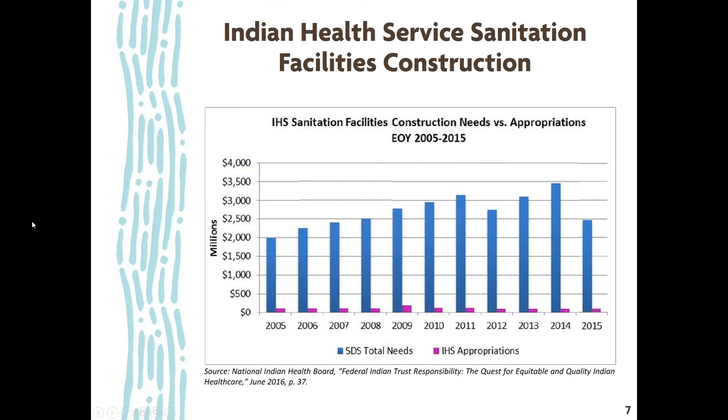So Alaska Native and American Indian communities don't receive adequate funding for water and sanitation. These are some of the ways that we work with tribes to ensure they have safe and sustainable water services. I'll discuss how we partner with tribes in these project areas: traditional and unregulated water sources, outreach and education, and engineering and evaluation.

Since we have a limited amount of time, I won't be able to cover everything. So, traditional and unregulated water sources.

According to the Indian Health Service, adequate sanitation facilities are lacking in some 145,000 Alaska Native and American Indian homes. Of that number, approximately 26,000 homes lack access to safe water supply and/or a wastewater disposal facility.

Some of the ways Native communities bridge this gap is through collecting traditional water, such as water from springs or streams, or collecting rainwater. Another way is private wells. All of these sources are not regulated under the Safe Drinking Water Act.

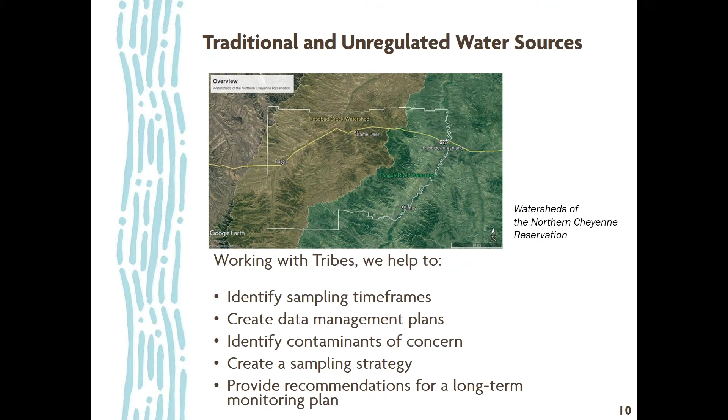You'll see in a sec just how great this project is. So the Water is Life project was created as a way to re-engage communities with water through public art.

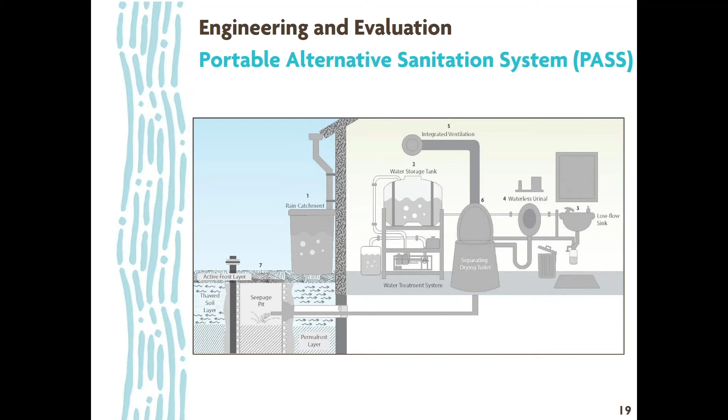But this system was created as a low-cost alternative for communities impacted by climate change and lack of water and sanitation. So there's about 34 communities in Alaska that do not have running water and flushing toilets, meaning they haul water and use honey buckets. And we all know that communities who lack water have higher rates of diseases than those that have adequate water and sanitation.

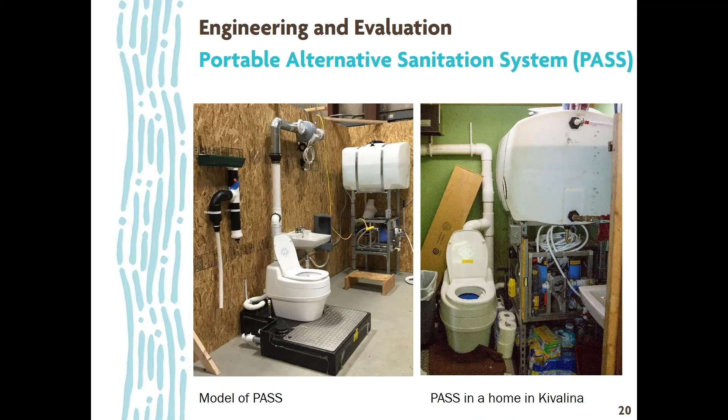And so the study I mentioned has special considerations when working with tribes. We have to go through a number of approvals in order to collect data and interview human subjects and work with communities. So we have to get approval from the tribe, we also have to get approval from their health corporation, as well as our own institutional review board here at NTWC. So we're working with the communities in a much closer way.

And we've also done this through the creation of community advisory committees in each community - there's one in Newtok and there's one in Kivalina. These committees review the interview questions, they know and understand the study, and they are aware of the methodologies being used to collect data.

We've only just started collecting data this last fall, but as we collect more, these community advisory committees are also going to help us analyze and interpret the data. So they're going to see what we see, but they're going to maybe give us a richer background and fuller understanding of what that data might mean.

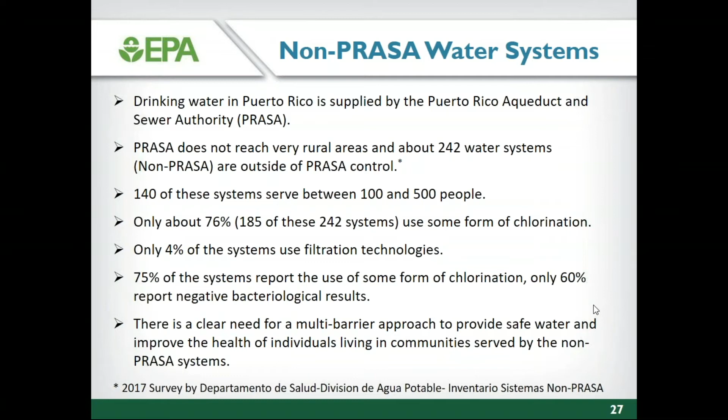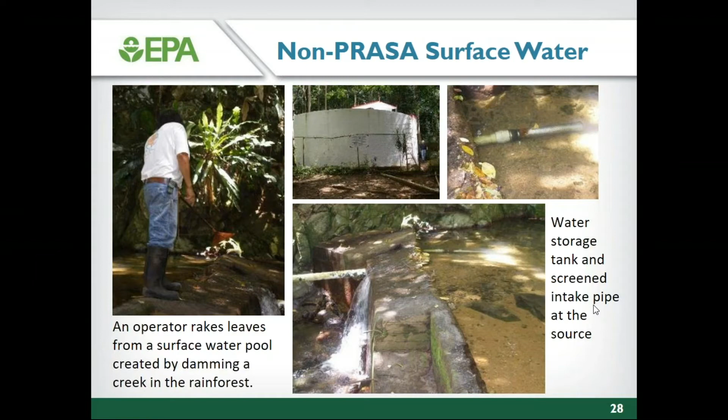A typical surface water system is comprised of a dam in a creek up in the mountains with a screened intake leading to a pipe that goes into a tablet chlorinator on top of a water storage tank, shown on slide 28. Slide 29 provides some other pictures of the tablet chlorinators on top of the water storage tanks. The chlorine tablets are replaced, the water flows and dissolves the chlorine tablets and introduces chlorine into the water storage tank.

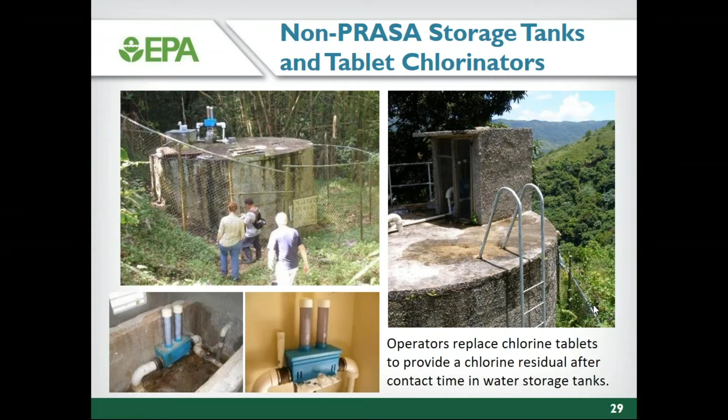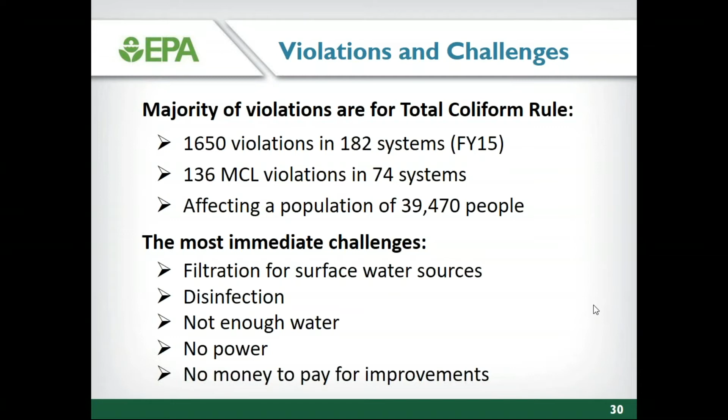The majority of the violations are for the total coliform rule. There were 1,650 violations in fiscal year 2015 in 182 systems, and 136 maximum contaminant level violations in 74 systems, affecting a population of roughly 40,000 people. The most immediate challenges are getting filtration for the surface water sources, disinfection, not enough water during drought seasons, intermittent power, and no money to pay for improvements.

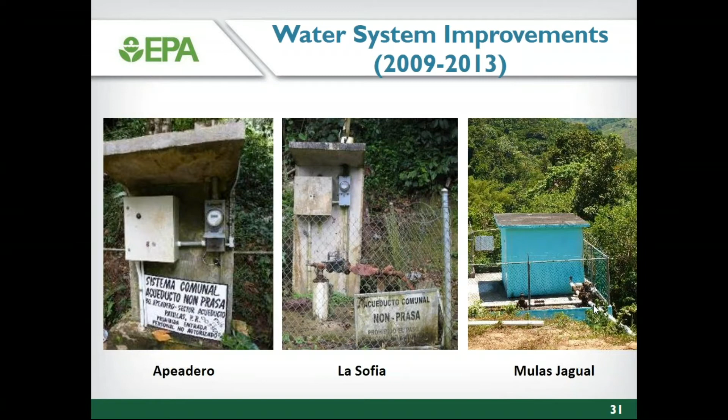The other communities all had water storage tanks with tablet chlorinators, but we wanted to add filtration. So we looked at slow sand filters, drum sand filters, pressure sand filters, biosand filters, and UV disinfection in addition to the tablet chlorinators. If there wasn't enough water, we tied together water sources and pumped the water. If there wasn't power, we installed solar power. And with no money to pay for improvements, we wanted to work with the communities to show the benefits of clean drinking water to get their buy-in.

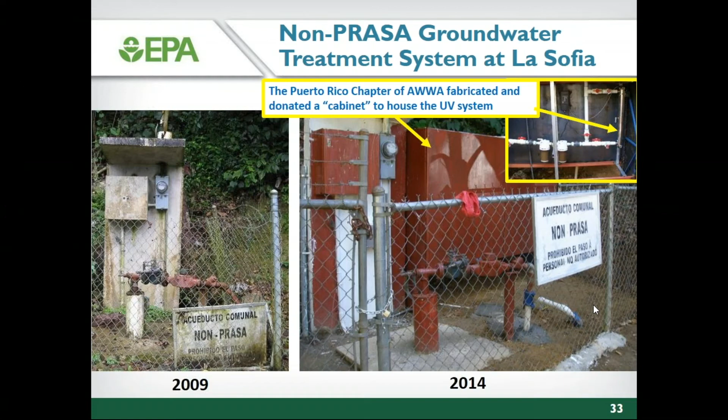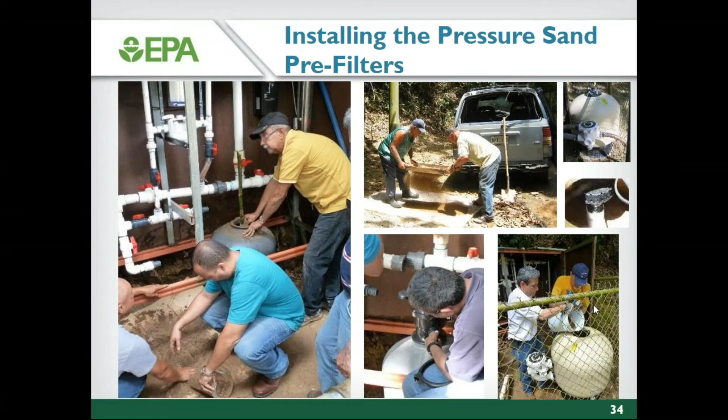The La Sofia system shown here in 2014 - the local chapter of AWWA fabricated this cabinet where we housed the UV disinfection system shown in the upper right-hand corner of slide 33. We also installed pressure sand pre-filters. The problem here was whenever the groundwater well pump would kick on, turbidity would kick up through the system, and this prevented the turbidity from reaching the UV disinfection system. Here we are installing the pre-filters, with community volunteers and operators helping out.

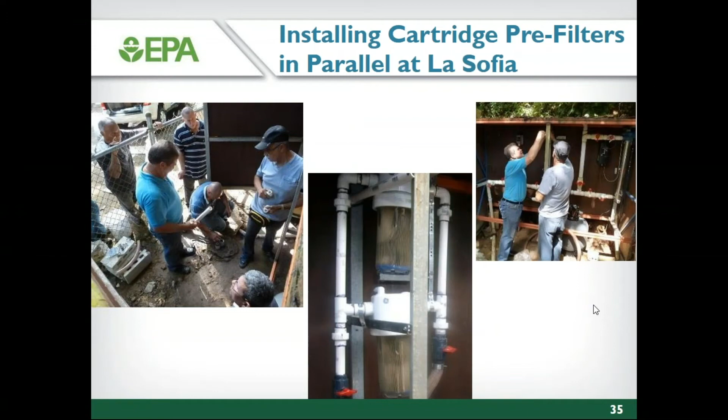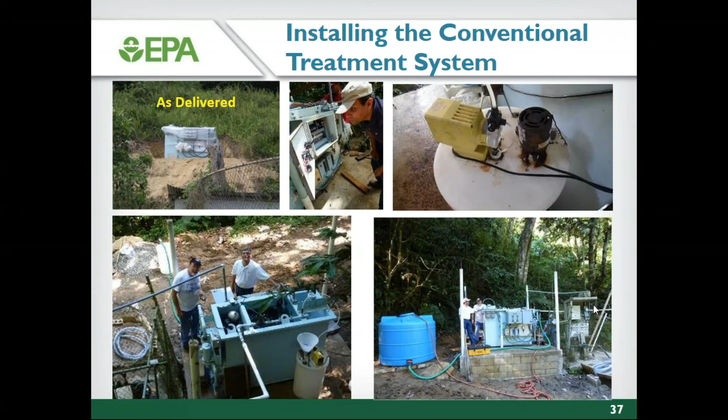The Apeadero system was a surface water system. EPA had a package plant, roughly $50,000 back in the 1990s, that they donated. It was shipped by barge through New York to Puerto Rico, and today's cost would be upwards of about $150,000. So it's not really a low-cost treatment technology, but it definitely was working well for the community of Apeadero. Here we are with the package plant delivered, installing the chemical feed tank and the electricity. The community had installed a platform for the package plant. You can see the backwash water tank, the blue tank on the bottom right-hand slide.

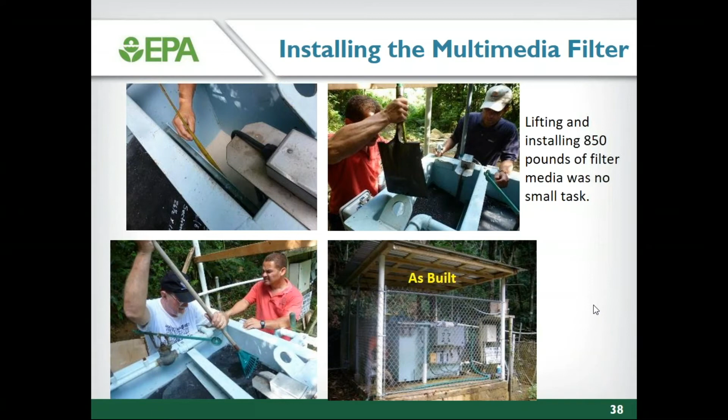Then we added the multimedia filter, which involved hauling these bags up to the very high point in the watershed. You can see the as-built system at the bottom of slide 38. The final system was a slow sand filter at Mulas Jagual.

Merck Pharmaceutical donated $50,000 for a grant through Inter-American University to install the slow sand filter. These chemical storage bins were used as a roughing filter. Gravel was added to take out a lot of the large particles before they made their way to the slow sand filter.

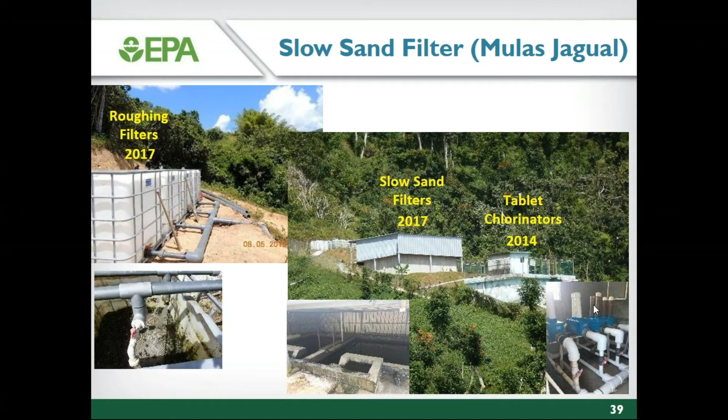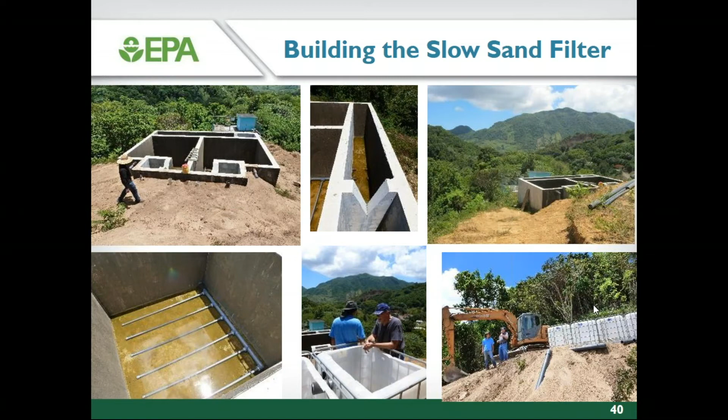Here's the slow sand filter being built. You can see how mountainous it is - that track hoe is about 400 feet off next to a 400-foot hill. So installing these water systems is no easy task. Here's the system as built with the roughing filter in operation.

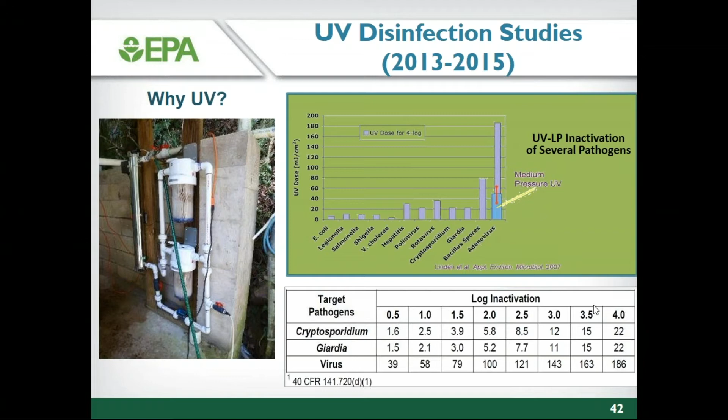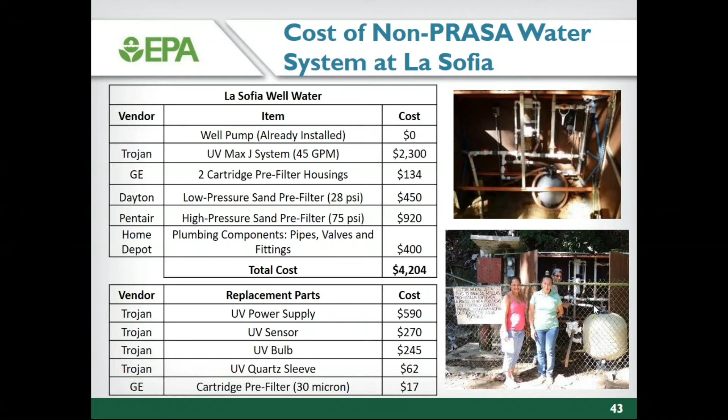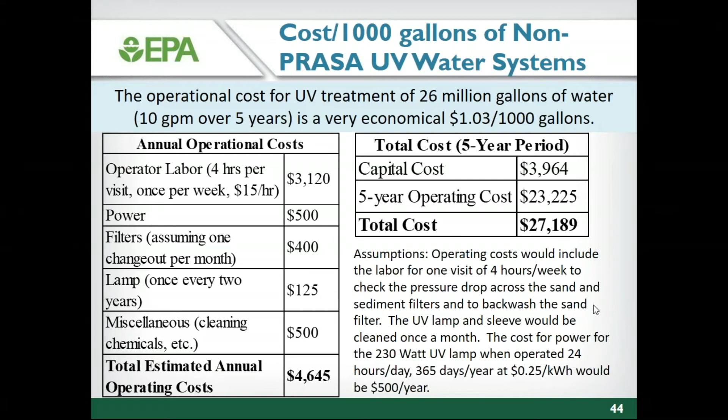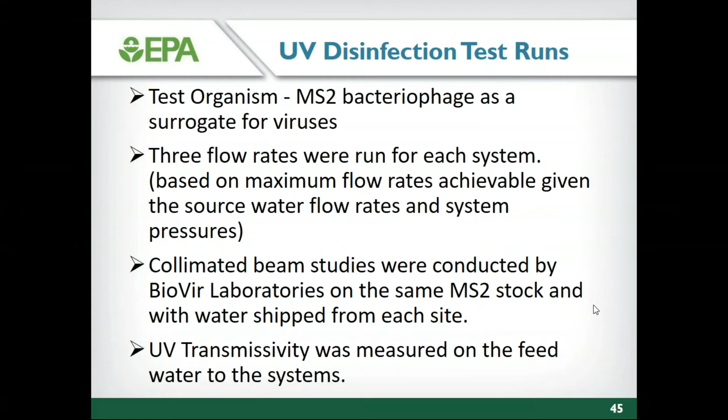The evaluation portion of this study was to use MS2 bacteriophage as a surrogate for viruses. We tested 3 flow rates on 2 systems using a collimated beam study conducted by BioVir Laboratories on the same MS2 stock and water that was shipped from each site. And then we looked at the UV transmissivity measured on the feed water to the systems. UVT results were very good at the time we did the study - they were all greater than 90%. UV disinfection system manufacturers typically recommend a UVT greater than 70%.

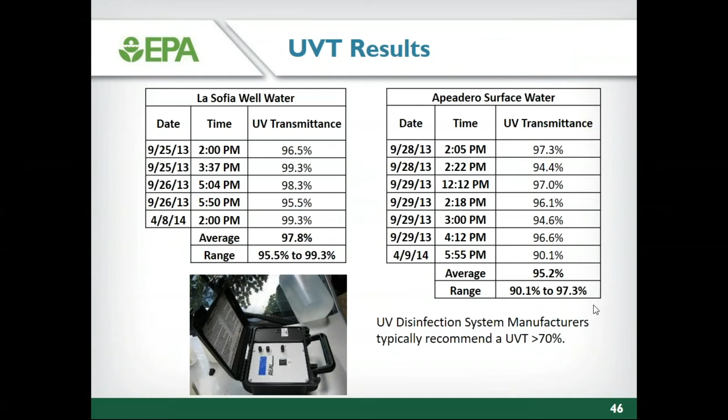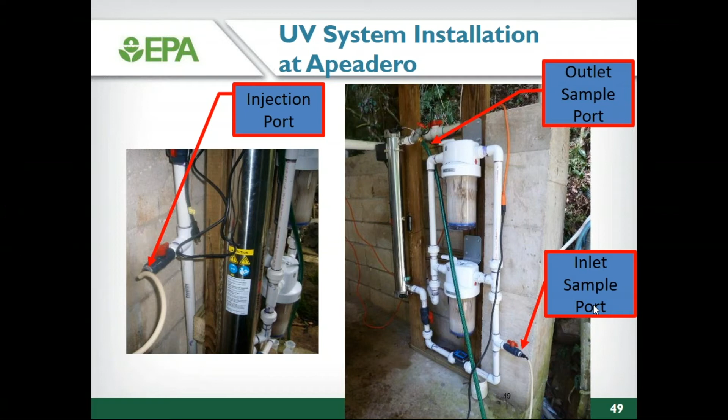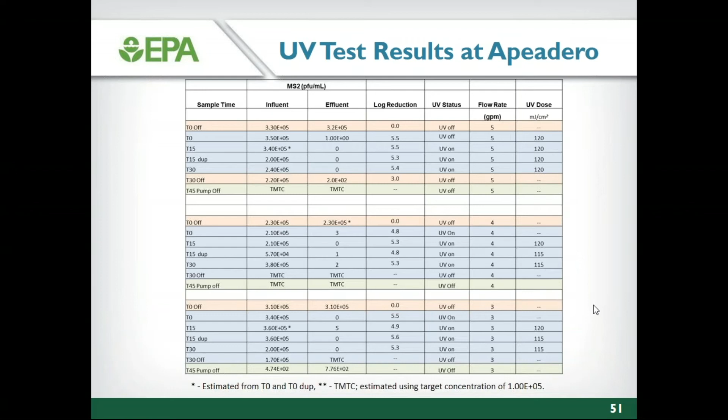In summary, Apeadero 7 MS2 viral surrogate studies were performed in September 2013 and April 2014 with UV doses varying between 90 and 120 millijoules per centimeter squared. The reason for the high dosage was that we were operating 45 gallon per minute systems at 5 gallons per minute, but they worked like a charm with 5 log removal, or 99.999% removal of the viral surrogate.

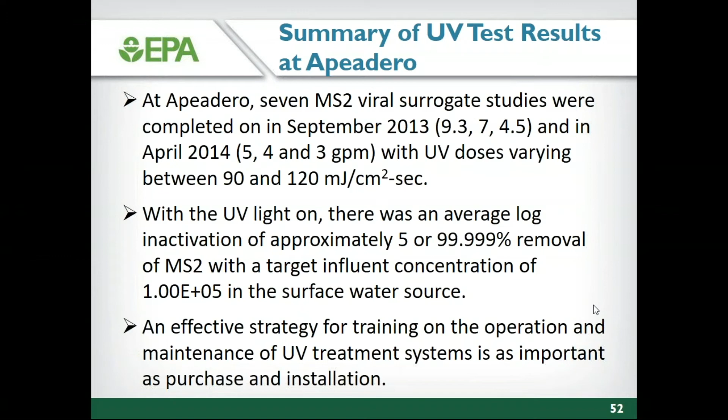In addition, an effective strategy for training on operation and maintenance of UV treatment systems is as important as purchase and installation.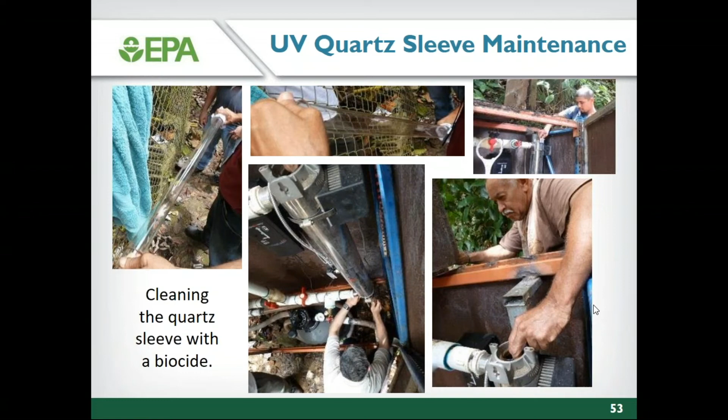I'm going to go through some of the UV quartz sleeve maintenance. In Puerto Rico, it's very hot and humid, so biofilm builds up on a monthly basis on the quartz sleeve. It's a green biofilm, and biocide is used to clean those quartz sleeves to keep the UV light reaching the water. The bulbs burn out typically about every 2 years, and one of our systems burned out in 6 months.

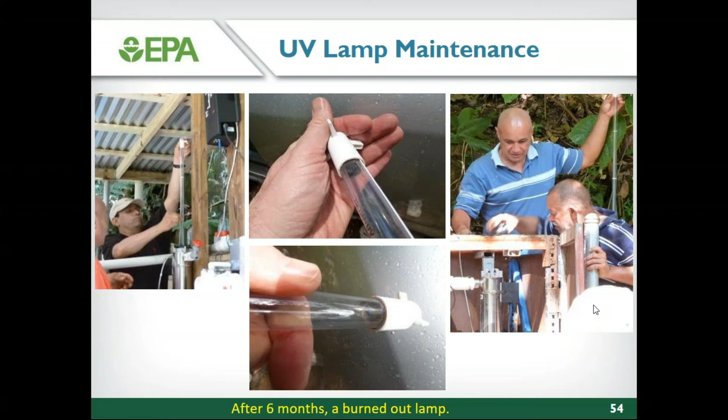They got inside the fan of the UV system, and also in our SUV. When we started up the conventional treatment system, they all came hopping out of the tube settler.

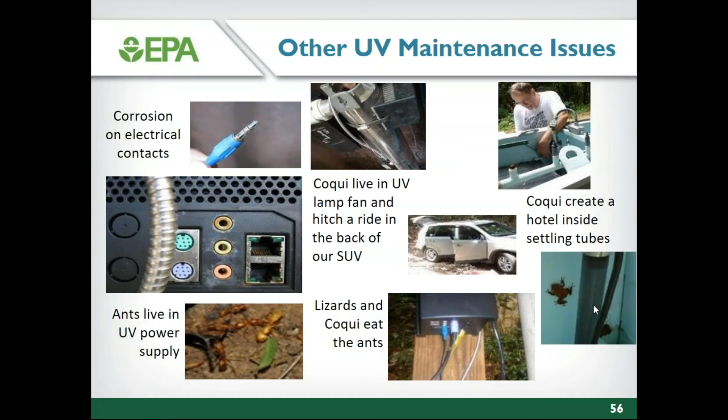Another lesson learned: do not assume that materials will be available on the island. The sand that's purchased comes from Florida, and for the pressure sand filter, we used riverbed sediment that we sieved down and installed.

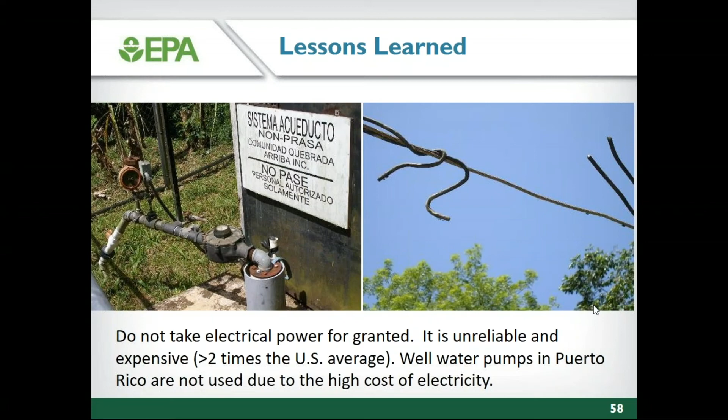Another lesson learned is don't take electrical power for granted. It's unreliable and expensive, greater than 2 times the U.S. average. Well water pumps in Puerto Rico are not used due to the high cost of electricity. These are UV study acknowledgements, thanks to the Non-PRASA water system operators and Inter-American students.

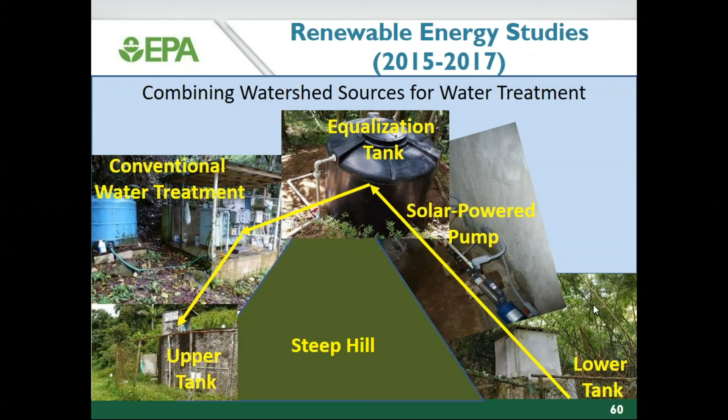The second study is a renewable energy study that started in 2015. There wasn't enough treated water for both communities. So what we did was combine the water from the lower source with the upper source by installing a solar-powered pump up to an equalization tank at the top of a steep hill, then gravity fed into the conventional water treatment system, and then down to the upper tank and to the communities.

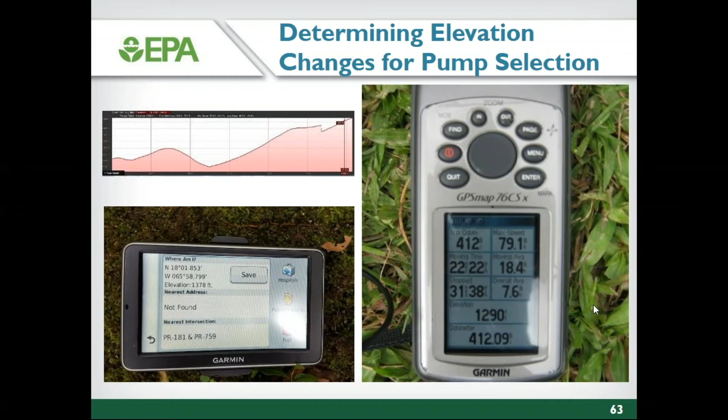We had to look at determining the elevation change for the pump selection. We used GPS units, 2 units, because of the rainforest canopy, and found a difference of about 350 feet.

Here we are installing the solar-powered pump and control cabinet. The control cabinet ensures the operation of the pump regardless of supply conditions, if there's no flow, or if there's an empty or full equalization tank at the top of the hill. A timer is installed to accommodate pumping at various times during the day.

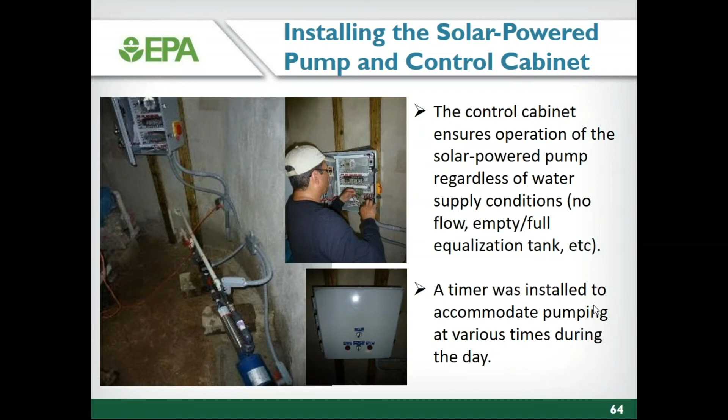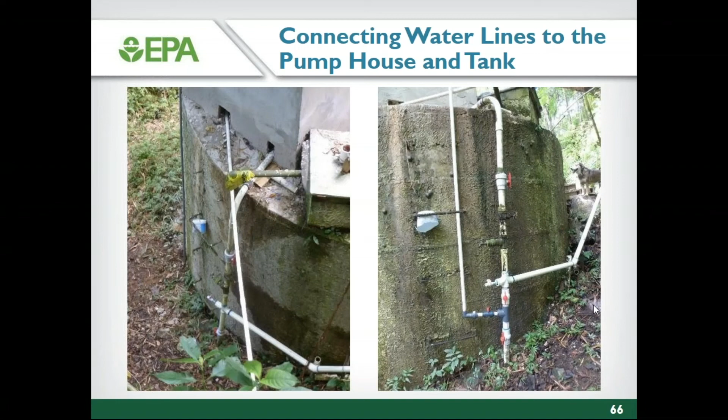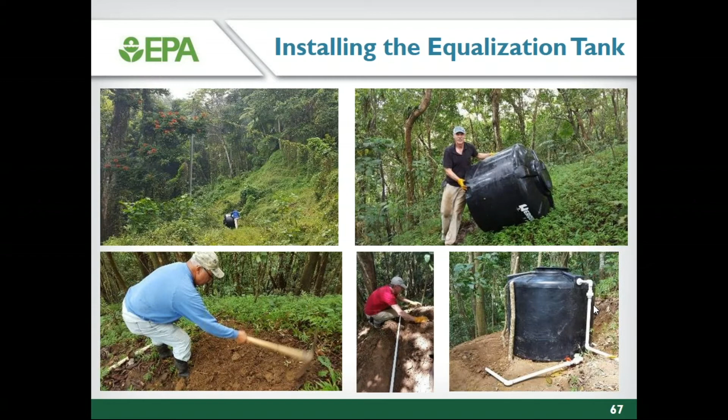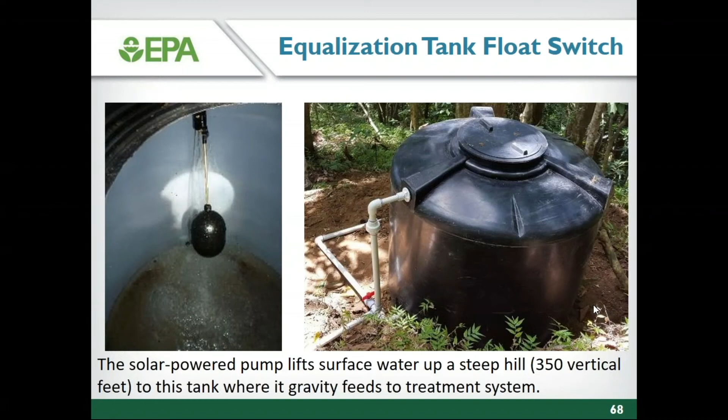Then we had to roll the equalization tank up the 350-foot hill through the jungle and find a level area to install it. Fortunately, the solar-powered pump worked. It lifted the water up 350 vertical feet, and now it's gravity feeding to the treatment system.

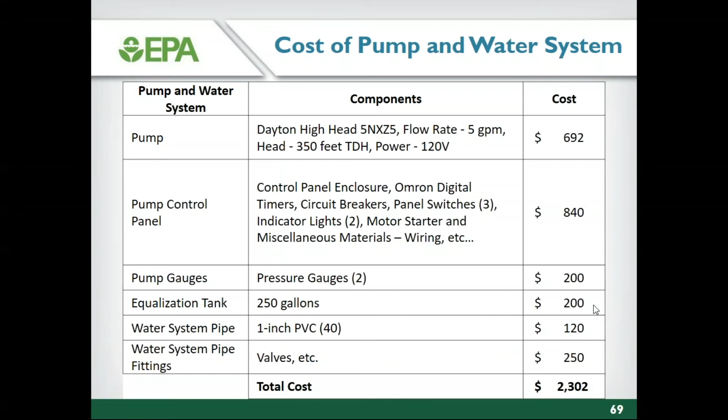Overall, you can see the cost, $2,302. This is without labor. It's a 3/4 horsepower pump, the pump control panel, and miscellaneous gauges and piping, and the equalization tank. So the second portion of the study was the solar power, and one of the major costs for electricity for small communities in Puerto Rico is the transfer, treatment, and distribution of drinking water.

As I mentioned earlier, because of the high cost, the communities revert to unfiltered surface water systems, which can create serious public health risks and non-compliance.

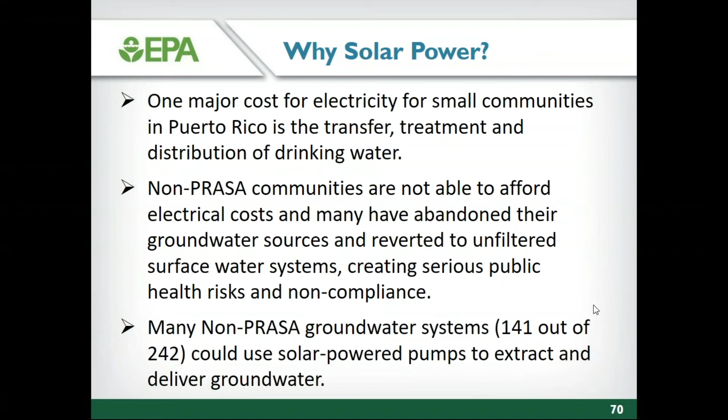Many of the non-PRASA groundwater systems, 141 out of 242, could use solar-powered pumps to extract and deliver groundwater. The good news about solar is its efficiency has doubled in 40 years, and prices dropped to 30 cents per watt. It's actually competitive with onshore wind power as of 2016.

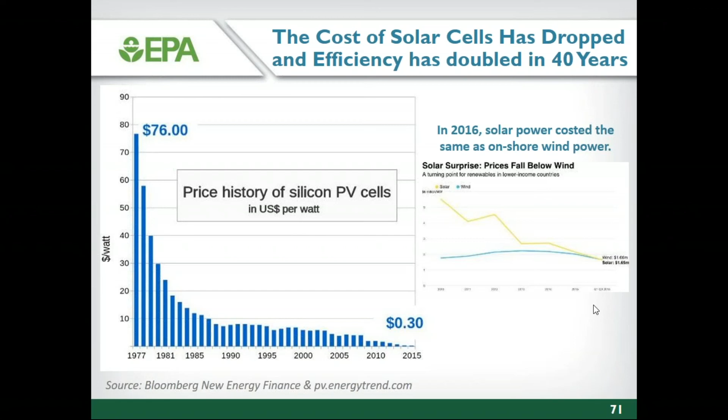A little background on solar panels: the high efficiency photovoltaic cells are typically used by NASA and are not commercially available. The commercially available solar panels are made from mono or polycrystalline silicon and are half as efficient, 14 to 22%. The largest solar panel manufacturer companies are based in China, the US, Canada, South Korea, Japan, and Taiwan.

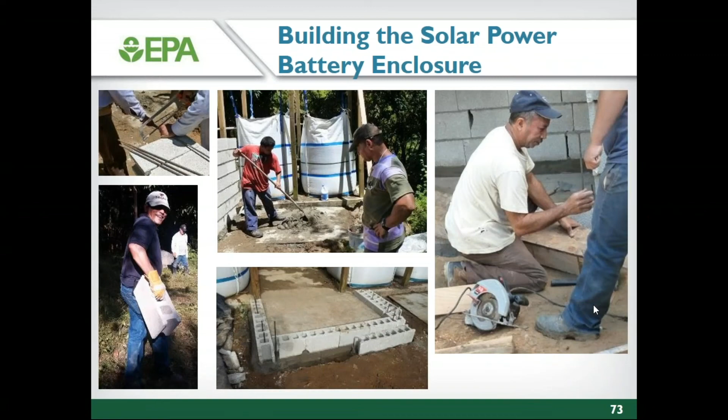In 2016, the US added about 125 solar panels every minute. In 2015, less than 2% of the electricity in Puerto Rico came from solar power, even though they have readily available sun. So the first step was to build a battery enclosure with community help to install the marine cell batteries.

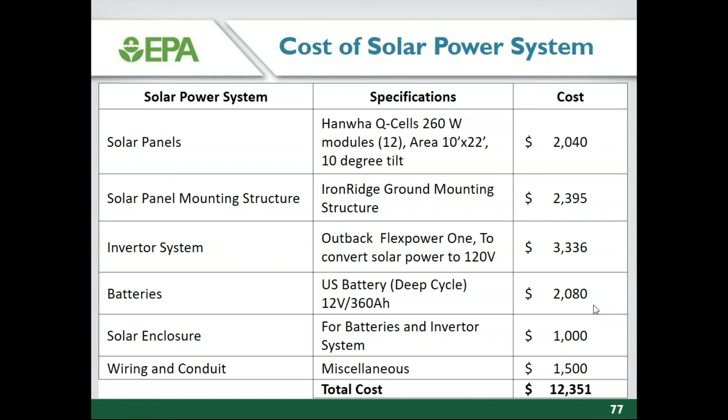All in all, the solar power system cost about $12,000. The most expensive item was the inverter system, followed by the mounting structure, and then the solar panels and batteries.

The environmental benefits: the energy produced by the 245-watt system in 1.5 years will offset the energy used to produce and install the system in Apeadero. As installed, the solar panels will eliminate as much greenhouse gas emissions as not burning 3,000 pounds of coal. Atmospheric carbon is sequestered by 2 acres of forest per year, and greenhouse gas emissions equivalent to not driving 6,600 vehicle miles per year.

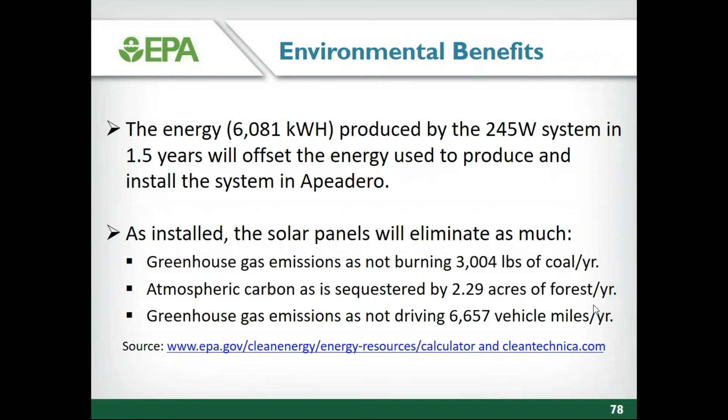The final study is biosand filter studies. This is the P3 biosand filter that we installed. We built a concrete pad with a frame. These are 1 gallon per minute slow sand or biosand filters.

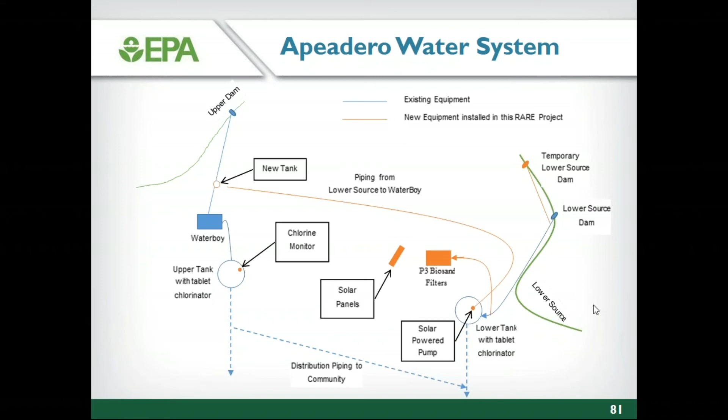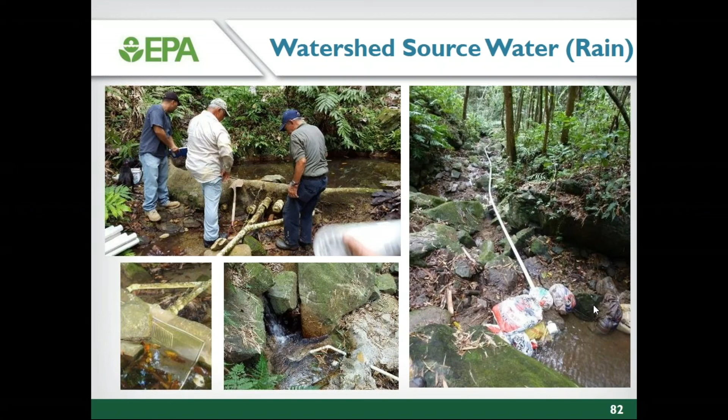One issue was we wanted them to be gravity fed, and the lower source dam was too low to gravity feed, so we put in a temporary dam above the biosand filters for gravity feed. You can see the original dam up in the watershed, and the dam that we built with bags of dirt, then added concrete after we established the water line.

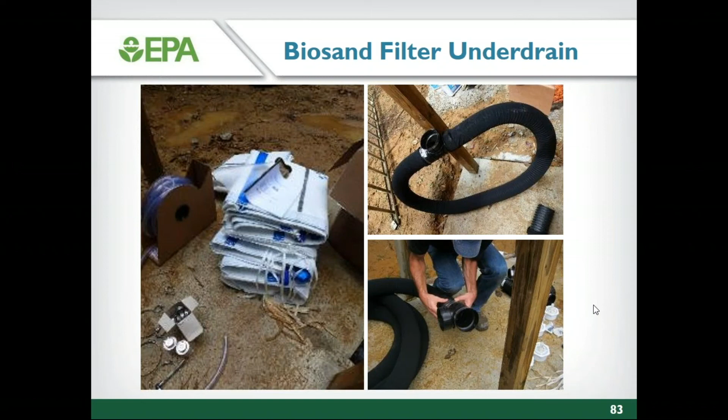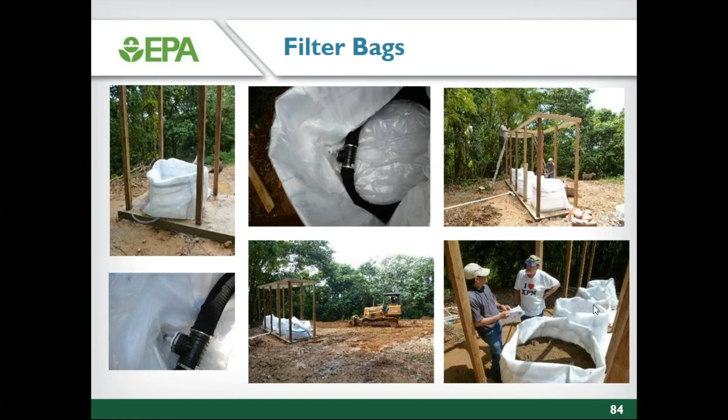It rained the day we brought the sand down, and it tore up the road, so they brought a bulldozer in to make it accessible again. Then the big deal is transporting and filling the bags with 15,000 pounds of sand, or 30 cubic feet of sand per bag.

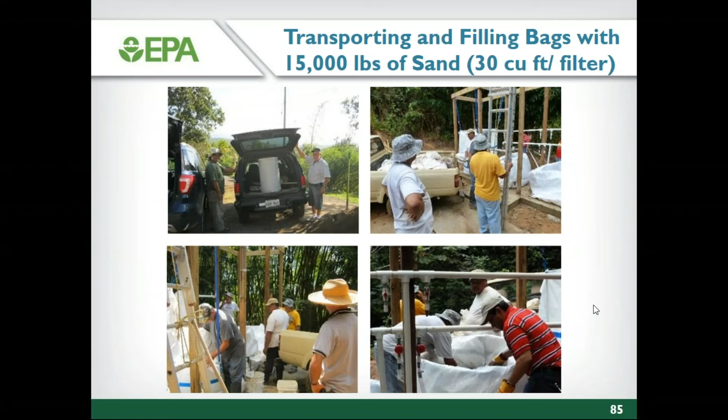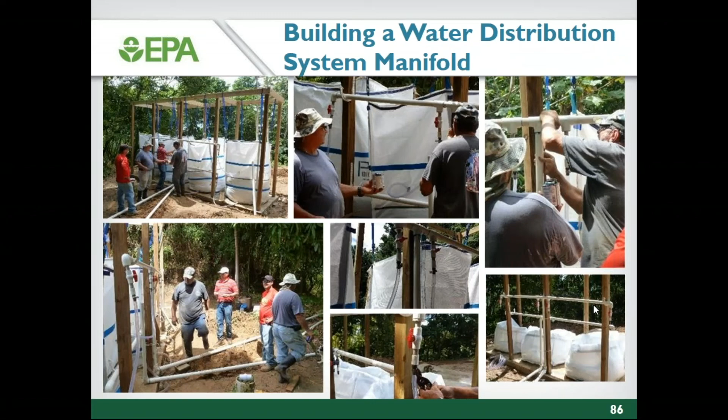We built a distribution system manifold to control the water level in the 4 biosand filters, and this is at startup.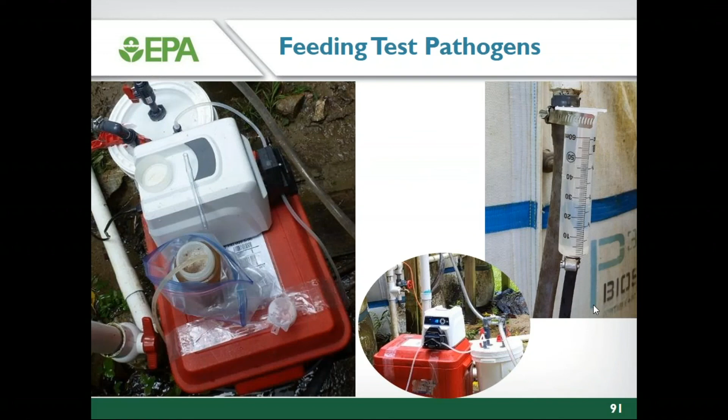We looked at the removal of Bacillus globigii and E. coli in 2 of the filters. We injected the test pathogens into a 5-gallon bucket, and then through a shower head. We had forgotten the shower head, so we made our own out of an Nalgene bottle, and that's the Schmutzdecke on the biosand filter as you look down on it.

Here are the results: you can see 3.5 to 4.5 log removal of B. globigii, and then 3 to 7 log removal of E. coli.

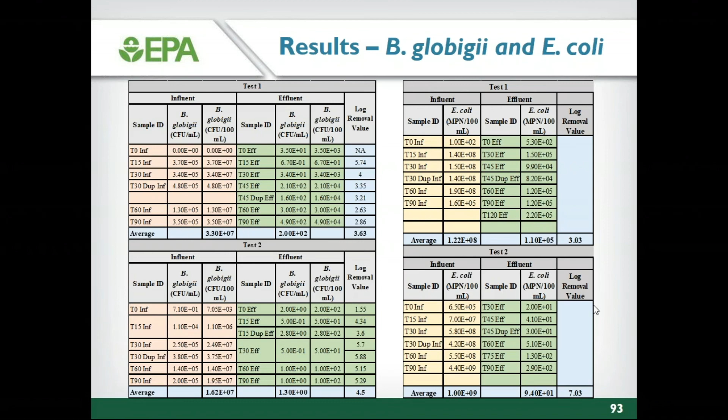So in summary, the biosand filter results show there are quite a few different local sources of waterborne pathogens. Oftentimes horses or cattle are tied up in the watershed grazing, and pigs have pens, but these goats run wild, and the dogs also move around freely in these watersheds.

The second, or the last study is the Citizen Science and Water Quality Monitoring Studies in 2017. You can see some operator training going on - all these small communities are invited to Apeadero to learn how to analyze water treatment samples.

We installed some source water monitors. You can see a turbidity sonde in the source water that will record the turbidity over time. We installed it in February of 2017, and at the end of April there was a huge storm, and the sediment buried the turbidity sonde, but we got about 2 months of data at about 4 NTU.

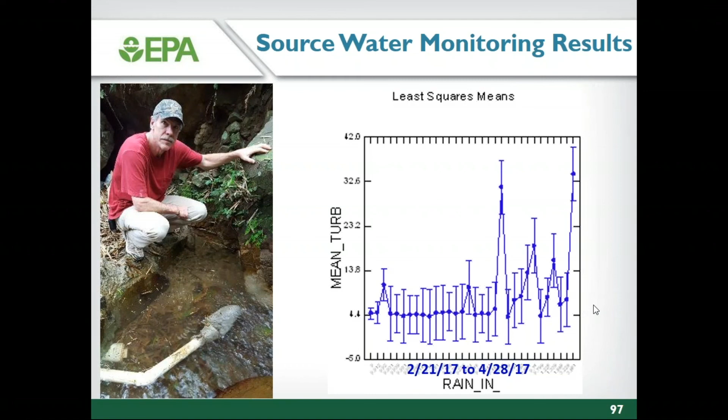Then the water quality sampling analysis - we worked with volunteers from the community on an IDEXX analysis, looking at total coliform and E. coli. We trained the operators, volunteers, and community members to do their own E. coli and total coliform analysis.

Using the IDEXX system, we went and collected samples all the way from the source, through the distribution system. The good news: the distribution system samples were very low in E. coli and total coliform. Some of the source waters between EPA and Citizen Science data were a little different, but I think those issues can be resolved with better subsampling techniques in the future.

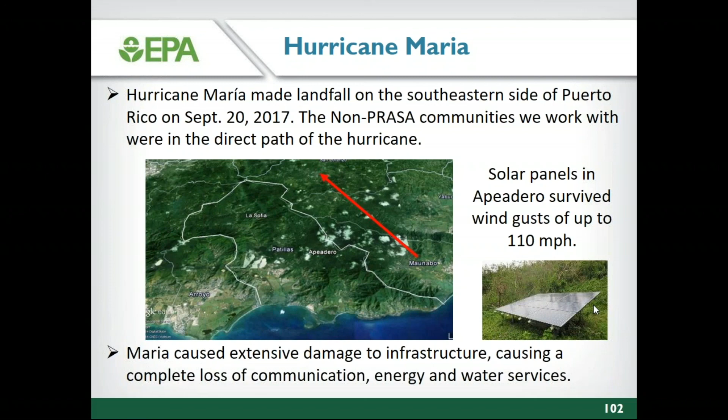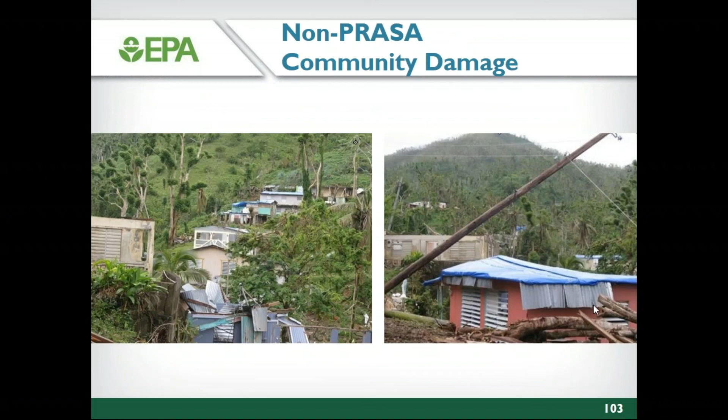Maria, as you all know, caused extensive damage to infrastructure, causing a complete loss of communication, energy, and water services. Here's some of the community damage in the areas we were working in. It looked like a completely different place after we came back to visit.

We had put the 1-inch pipe through a tree root, and I went up to find that tree root. Fortunately, the tree hadn't come down in the hurricane, but all the other trees around it did. So it kind of shows you how extensive the damage was.

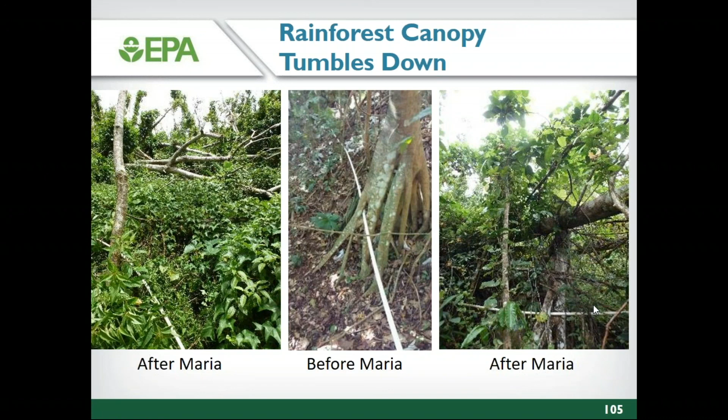In fact, the photo on the left after Maria shows about 5 foot of vegetation that grew up in about 6 months, compared to before Maria, where there was very little vegetation by the tree. There's some of the creepy hurricane vegetation that took over the solar panels and the biosand filters.

Our water systems, fortunately, avoided extensive damage. However, you can see one major tree just missed the package plant, and it's still sitting there, I believe. We're trying to come up with a way to get that down without destroying the groundwater well below it.

I believe a boulder rolled down and hit the concrete wall, causing the damage in the center bottom picture of the slide. And a tree came down on top of the solar powered pump enclosure, but it wasn't damaged.

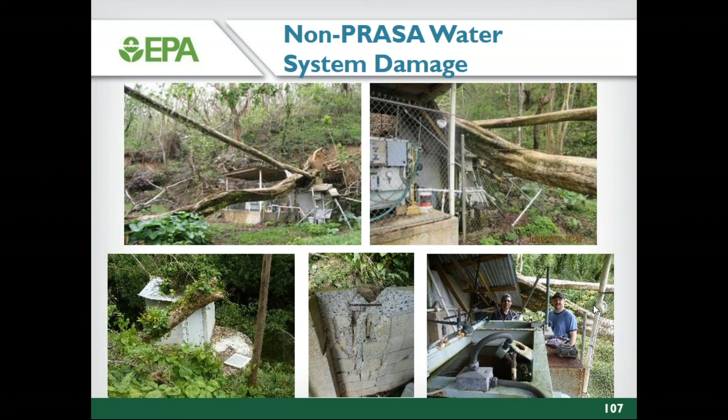So, lessons learned: community involvement and education are critical. If the community does not see any benefit from the water system, they will not take ownership, and payment is difficult to collect. We use local assistance to keep the community involved. The economy is a challenge, and it is amazing what can be constructed in difficult terrain with everyone pitching in.

I just want to recognize some of the people I worked with on all these projects, especially Dr. Graciela Ramirez with Inter-American University, Dr. Melissa Crespo with Inter-American University, Harvey Minig with Inter-American University, Christina Maldonado with EPA Region 2, Rajiv Sinha with Tri-Hydro Corporation in Cincinnati, Ohio, and then all the volunteers and operators: Pedro Silvario, Taina Javier, Lisa Albanese, Carlos, Dan Williams, and Roy Morrison.

So with that, are there any questions?